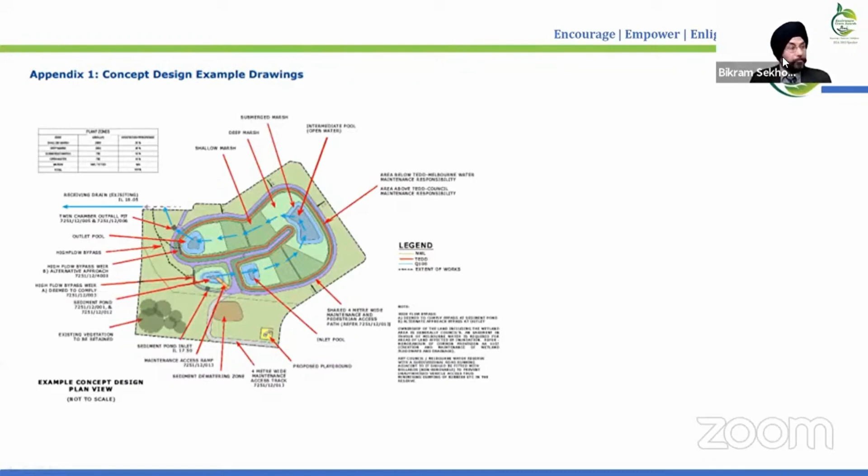I'm sorry, this is not... I hope you can... Yes, sir. We can see your slides. Can you see the screen? Yes, I can see your screen. We cannot see the presentation now. Can you see the... Yes, yes. Okay.

So the Australian experience is primarily based on how the residential development and how the water is used to making or enhancing the life. One thing I just make it clear that in Australia, especially in Melbourne, we are using rainwater as a major source of water for drinking and daily purpose. The groundwater either is not good or is not used for most of the time. So we rely on a water conscious development, which is the best use of every drop of the water available around us.

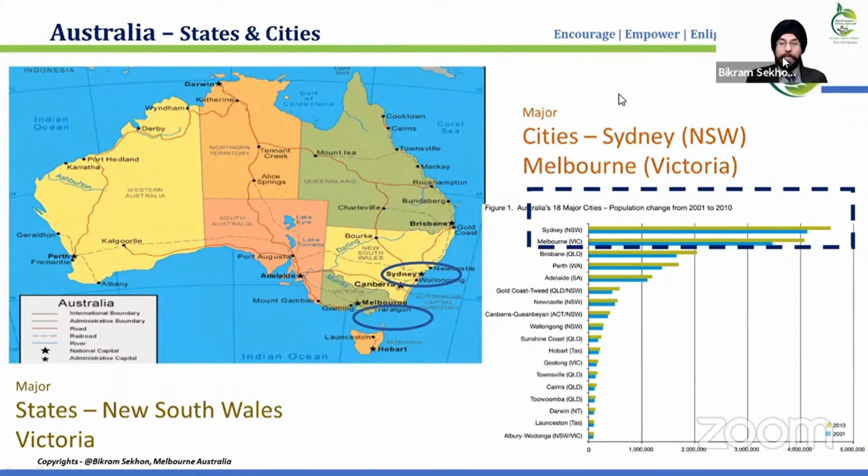But it's very important to understand now that over the years, what happened that Melbourne has become in the last few years most livable city, while Mumbai or many other Indian cities are unable to achieve such status. So this presentation will also give us an insight to understand our broad policy and design approach and what techniques we can develop in order to make our cities better.

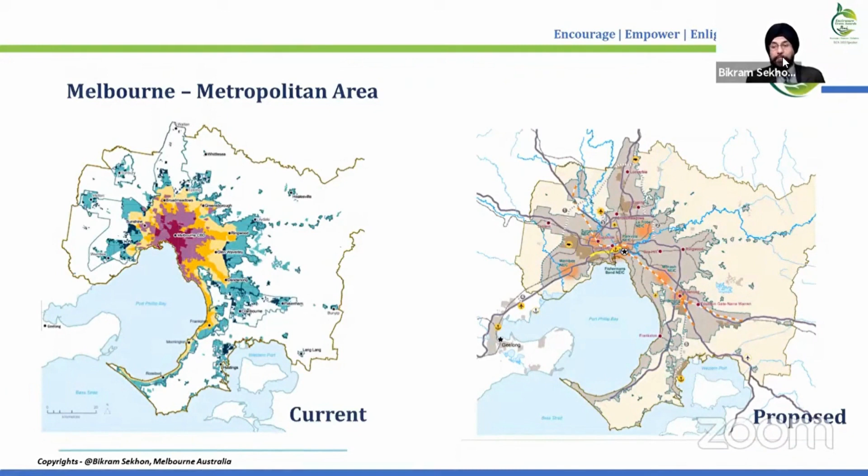This is just a broad concept how the Melbourne metropolitan area is. Primarily, the development is around network and how these networks we are developing as green networks. That is one of the area where the changes in policy and planning has been observed in last almost 2 decades. If you see broadly, try to make it conceptually clear. As we go into more micro details, we find there are more kind of activities at a local level. And when we go to the peripheral level or the city level, then the activities are quite broad in general. And in regional area, the context will be different. And similar approaches are adopted for Indian cities too.

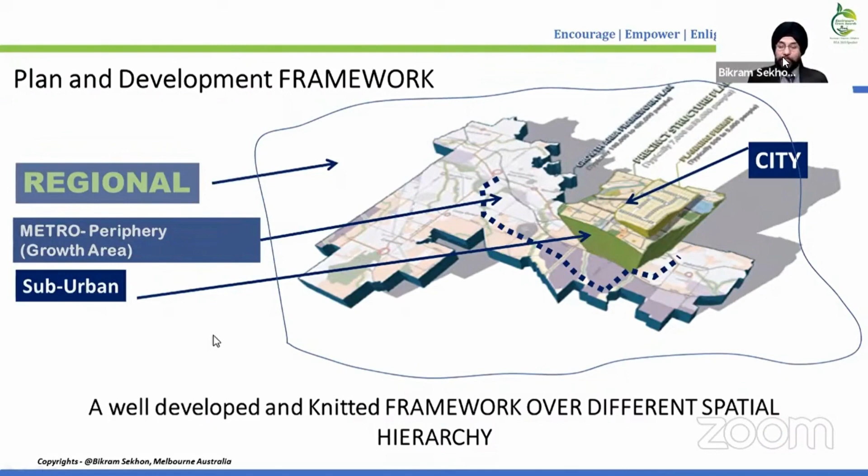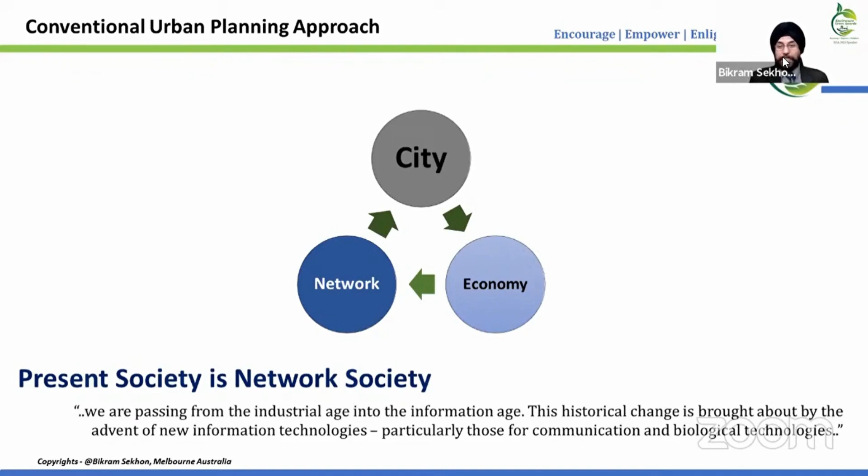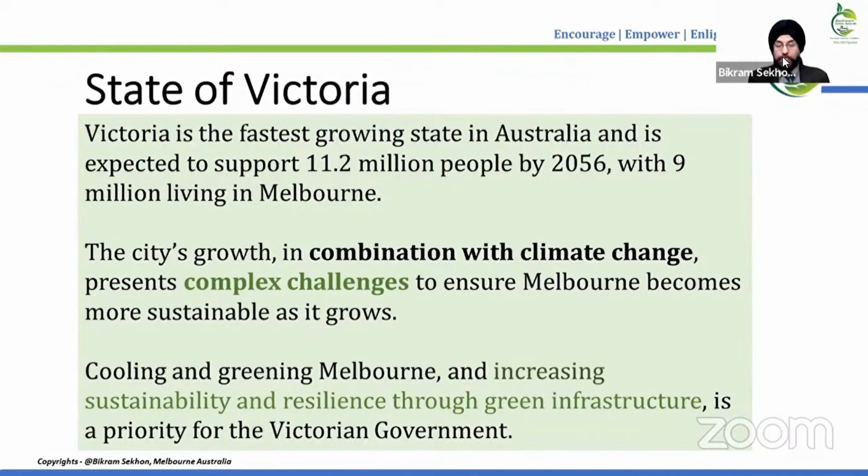So obviously, we believe the current society where we are living is primarily based on network and our cities connectivity and the economy related to them. But what is the new approach? This is the conventional approach that all over the world is used in city planning. But the state of Victoria has taken the complex challenge of climate change involved in urban development and considered these networks as a part of green infrastructure development. So this is one of the priorities to develop green networks.

So again, if I show you the same picture, here, now these two parameters are very important. The network for us are basically the green networks. So when we say green network, it means it has water sensitive techniques, it has the vegetation technique, it has the cooling environment, it has a better city look environment, and all these are embedded together in the form of urban design and urban planning.

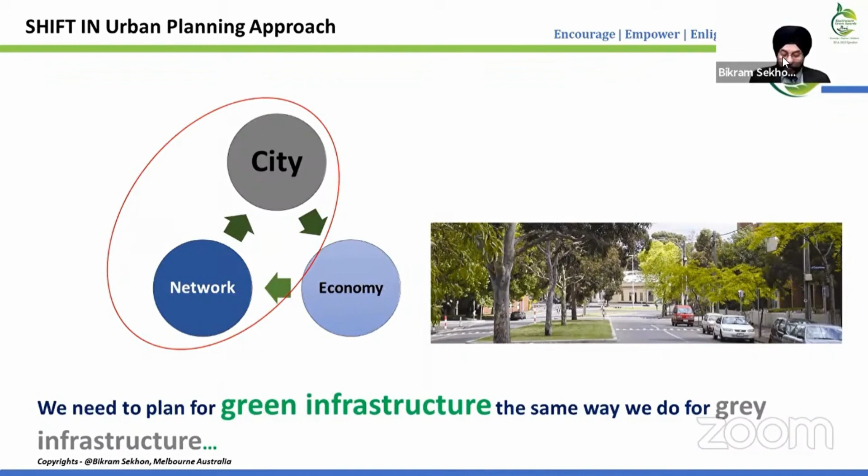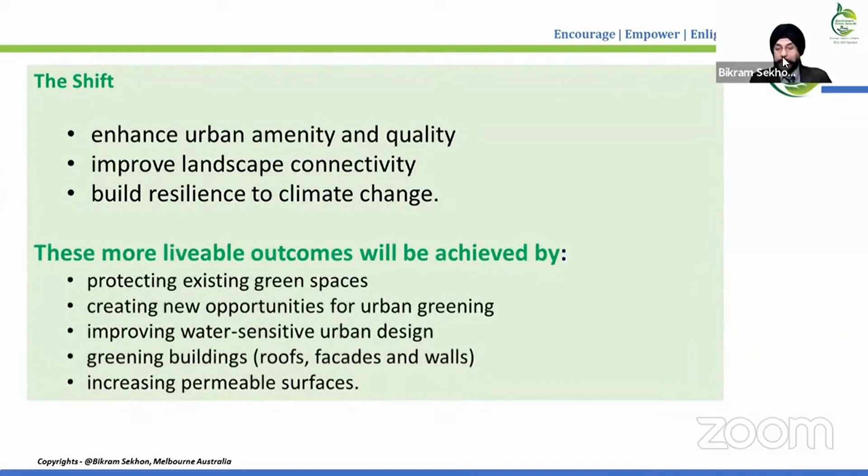So the shift primarily is based on enhancing the urban quality, enhancing the landscape connectivity, and also developing towards resilience and our tolerance to the climate change. This is the factor which is nowadays very important and concerns all of us. And to make the city more livable, we protect our green spaces on priority. We improve water sensitive urban design. We give greening of buildings, and we also make permeable surfaces all over and calculate and use them in the design data.

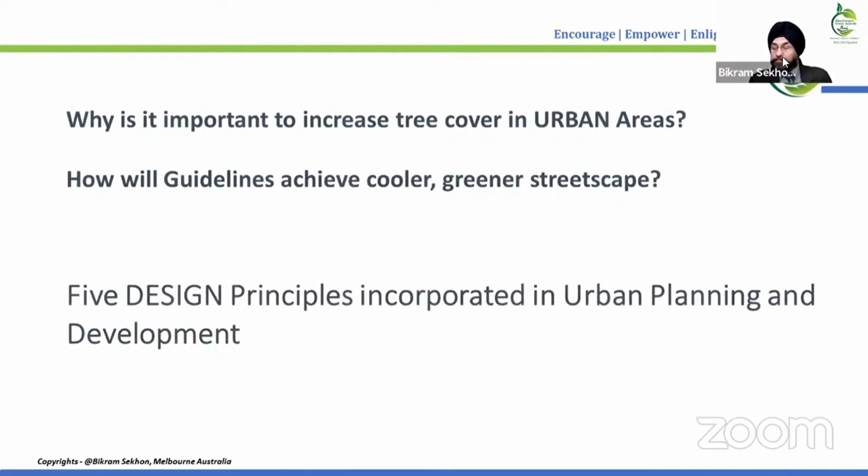We all know this concept of why trees are important, and the 5 basic principles which we use in our planning. The first 2 are on policy matters. That is, we should have places for trees. It's the wisdom of knowing how to plant a tree and where to plant a tree. And then we also need to create a surrounding environment around a tree.

And the last 3 points, if we see, are more related to design. If there is a tree, we also need to provide a source of water, how the trees are to be watered. And then we also need to provide supporting infrastructure to create activity and life around the trees. And obviously the last part is more about what we have achieved at the end of the day, which is more analysis, more objective.

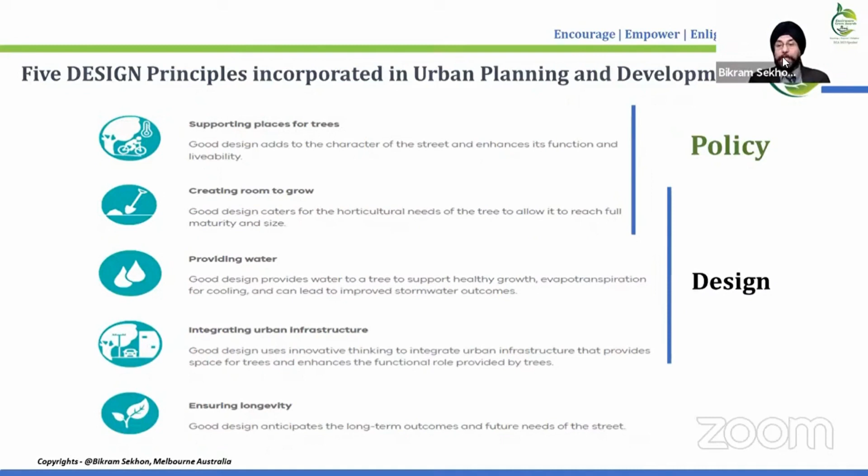So based on these 5 parameters, we design our cities, and I will go into further micro details of how these parameters are helping us achieve a better environment. Here I try to synthesize the whole system. The crux of the issue is that we have a very strong digital monitoring system for all the activities. And this is not a recent development; it has taken almost 3-4 decades to develop the whole network, where the universities, scientists, government departments, planners and decision makers developed a policy, and that created a national environment science program.

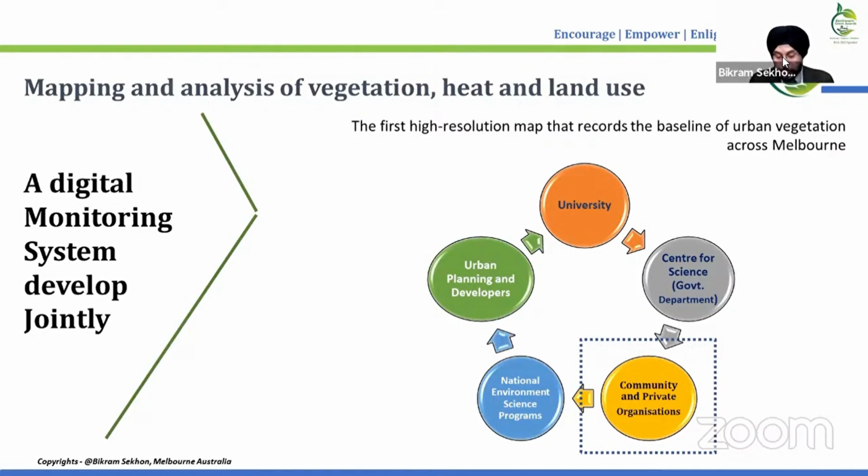And of course, this was possible through the collaborative achievements of community and private organizations. Since most of you are working in different organizations, if we make a collaborative and integrated program like this, we are able to achieve better targets that we can develop here. I will show you how these programs are helping each other.

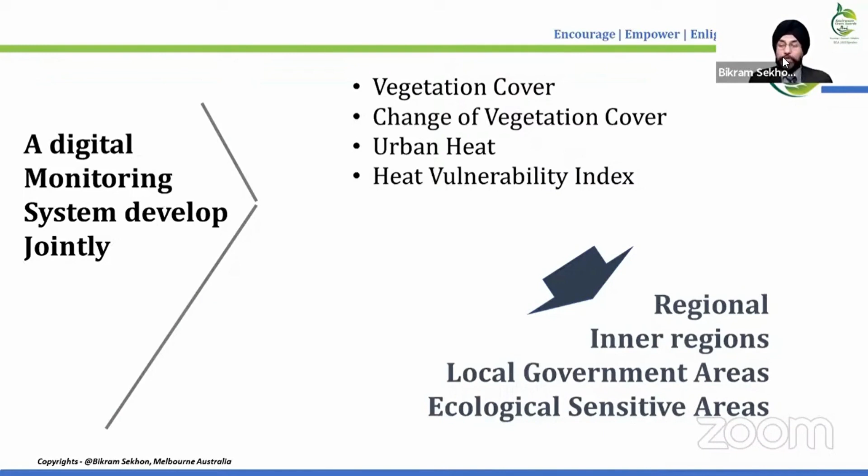So some of the common things that we are doing here, we have also done in Indian cities, like vegetation cover detection, heat vulnerability index, change of vegetation area, ecologically sensitive areas, but they're more on the policy level. We have achieved much less on the design and integrated approach level. Let me show you some of the action programs mentioned here. These are very broad, and I'm keeping it very brief so that you can detail out some of the areas. If anyone in the audience would like to detail out some of the action programs, I can do so later. I can also send them the broad programs.

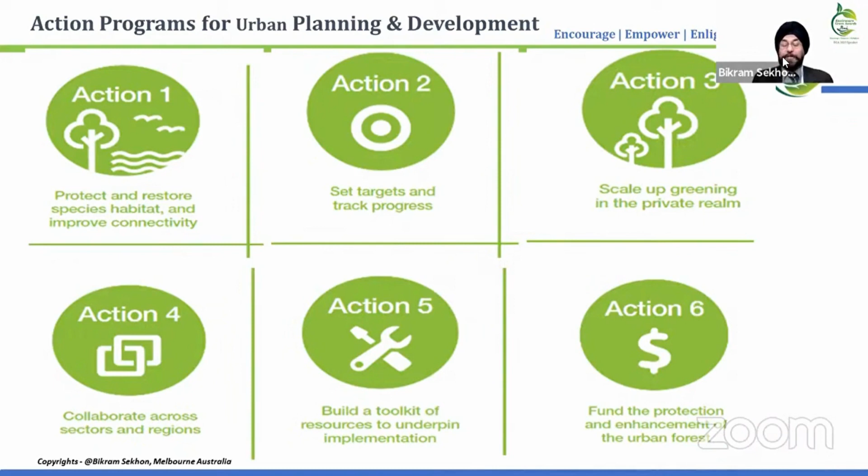Action 1, protect the resource, which is the species we have. Action 2, set targets. In every policy, in every design, make the objectives achieve the environmental objective. Action 3, scale up greening so that we can increase the greening areas. Action 4, we need collaborations. We need integration among other areas. Then building a toolkit, building a resource kit for each action group, even for the society. And at the end, which is very important, the 6th action, funding: how to fund the various programs in all these areas. If we integrate all the key aspects, 6 aspects, we can develop a better program.

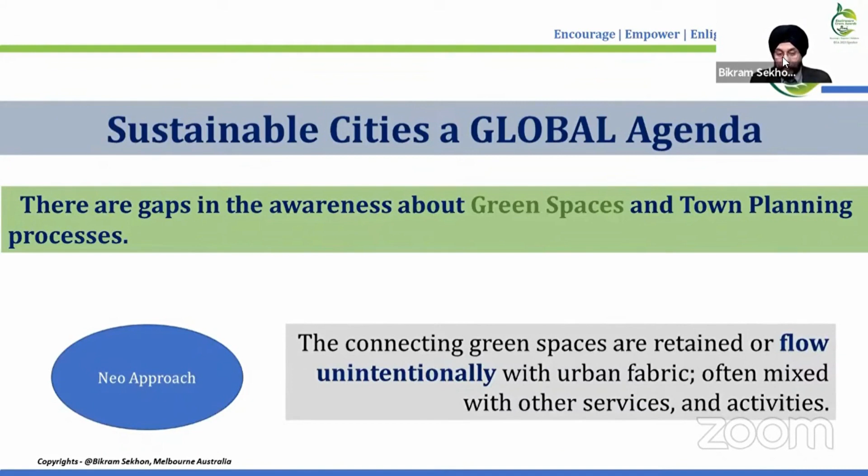Of course, we know that sustainable cities are a global agenda. But what is the new approach in urban planning and development? So this is the target we achieve here: we need to retain urban development within the urban landscape and manage the green areas, as I said initially, in the network. And here I'm showing you some examples.

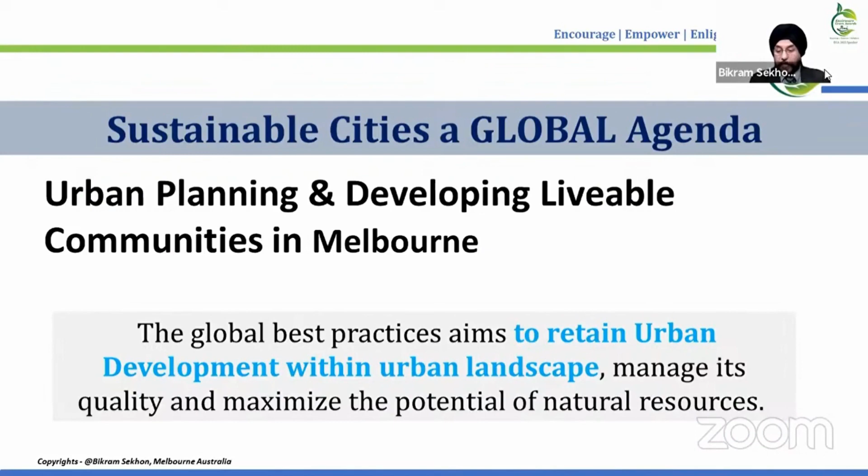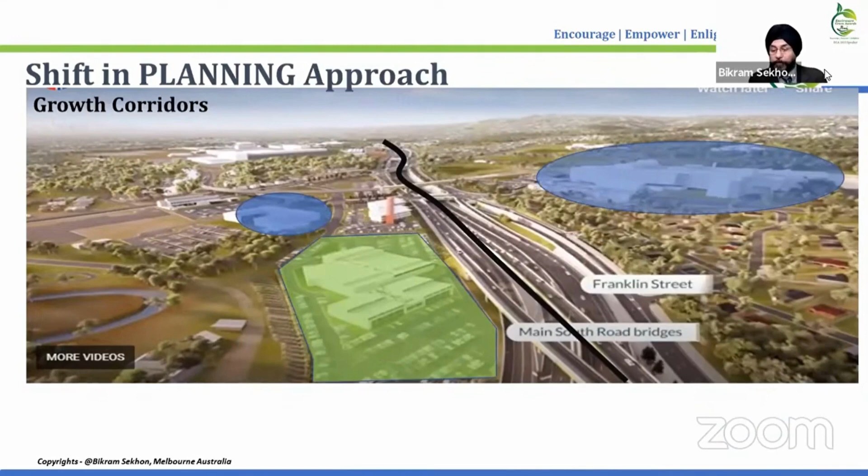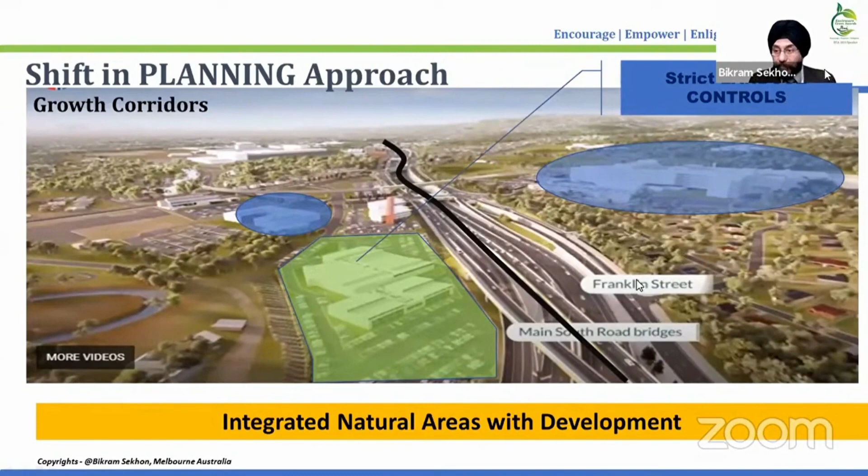This is a major highway that passes through the city. And if you see, in the city all these highways have strict land use control around them. One of the easy ways is to achieve integrated natural areas with the development. We are controlling the natural area, controlling the hierarchy of spaces. We are also developing cycle tracks and walking tracks all around the highways. We are also developing alternative transport modes, and less car-based networks, so that we can integrate with the other activities within these areas.

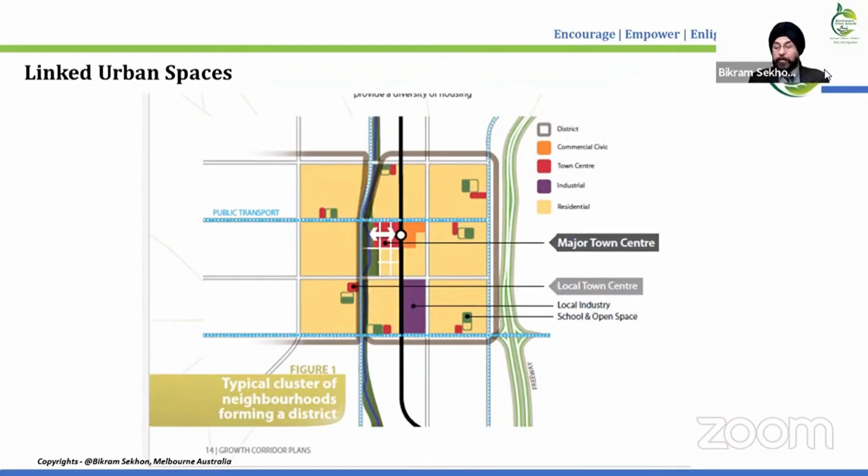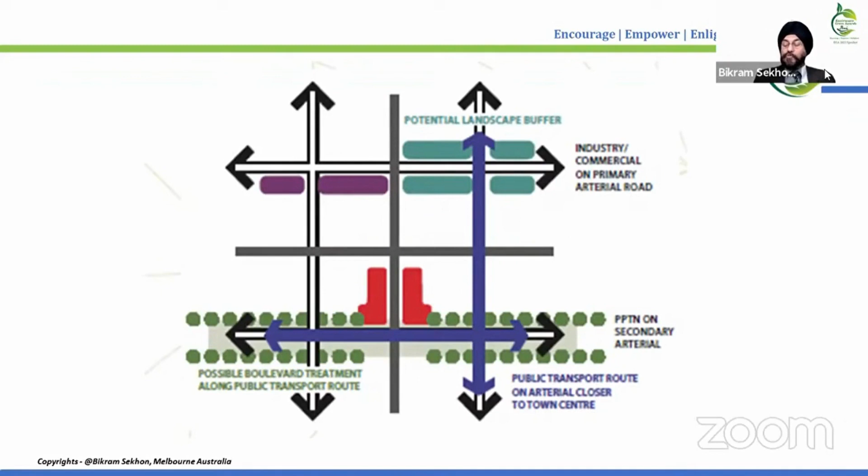This is just a snapshot of the various hierarchy levels of roads that most town planners use. If you see, this is the arterial road network based on bus public transport. And this transport is supported by a local level transport network. With this local level transport network, we integrate cyclists and pedestrians, and also encourage activity in those areas so that we can develop the green spaces.

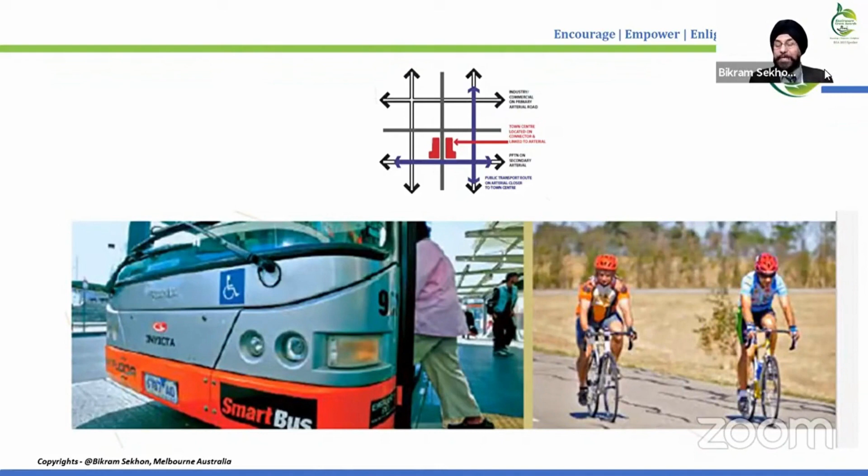And within green spaces, we try to create our movement pattern, and at the end of the day, these all enhance the sustainability of the area. Based on this concept, let's see how we can achieve it in a residential estate. This is the broad network plan of the north side of the city.

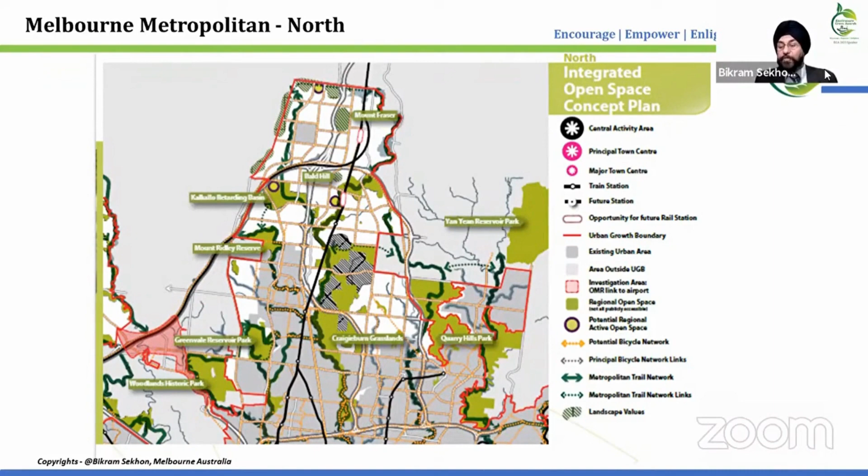I have shown you one map which was showing the network plan, but this is the recent network plan which involves a lot of green areas around the network, on a regional scale. If you go further into micro detail, I will tell you how, within these networks, WSUD, what we call water sensitive urban design guidelines, are helping various areas.

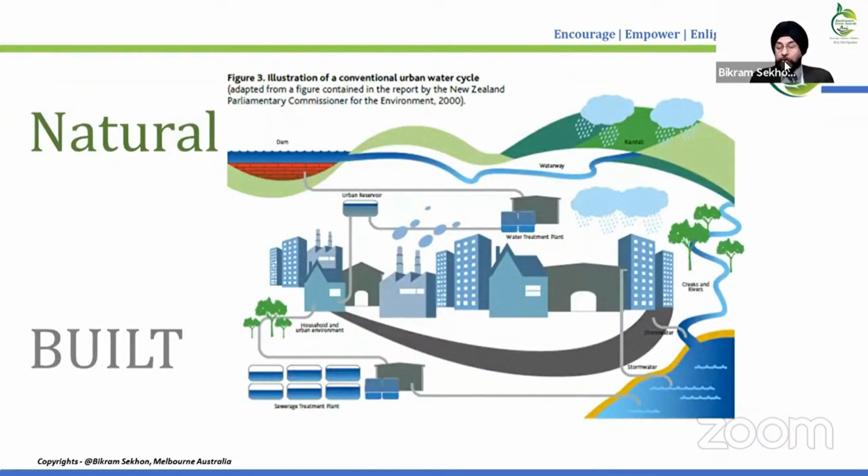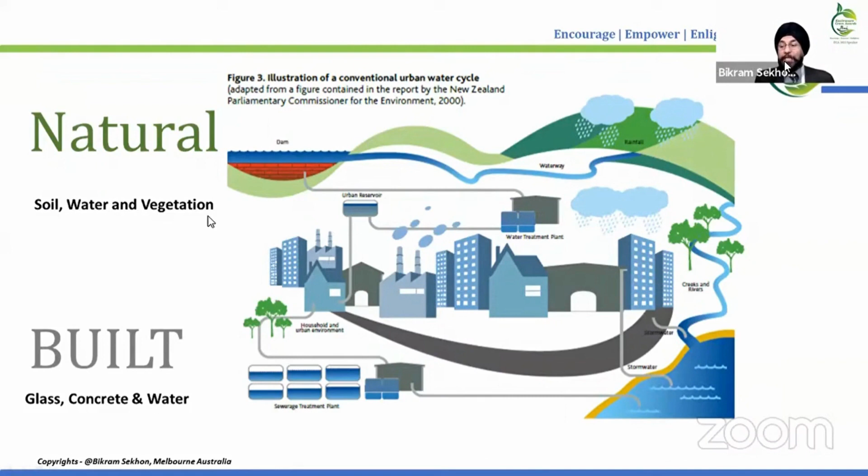Now, as a concept, in the natural area there is a combination of soil, water, and vegetation, and we are changing this pattern into a hard pattern of glass, concrete, and water. With this transition, we are changing a lot of chemical properties of the water, so the question is how to achieve the best WSUD objective in a natural treatment process so that we can achieve the natural soil, water, vegetation combination.

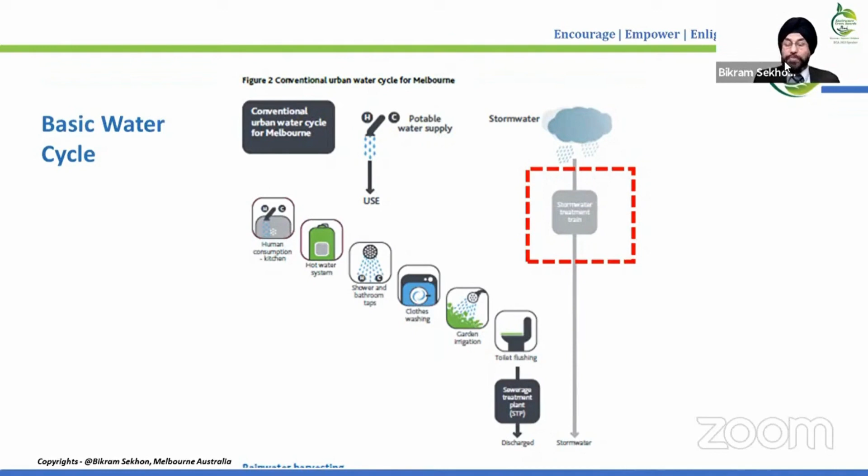This is the box highlighted here. If you cannot read the text, it is a stormwater treatment train. We treat the stormwater before it reaches the destination in such a way that it requires very little treatment later on. So when the water passes through the cyclic process, it's treated at every stage.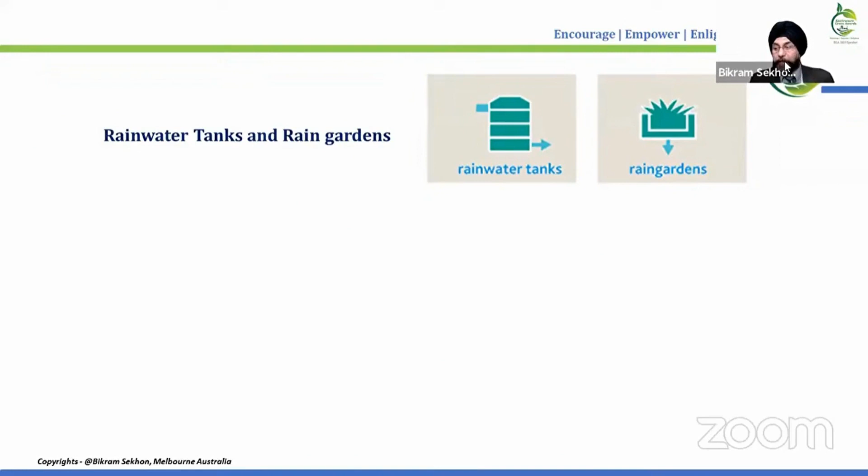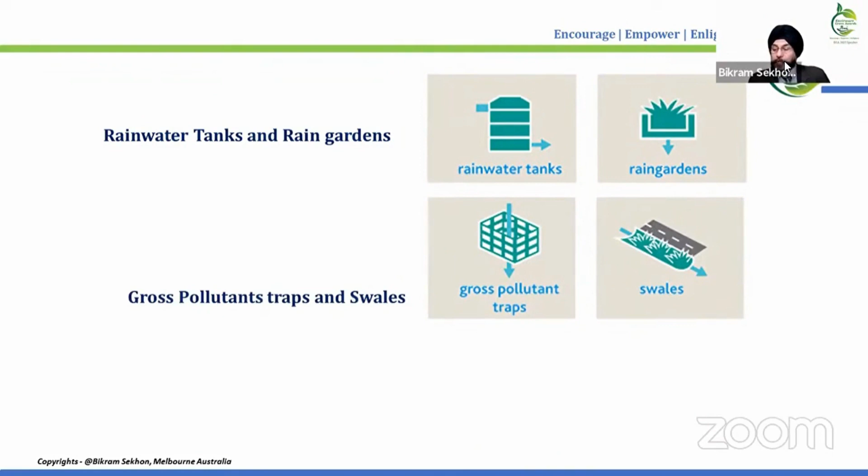The first part of the treatment train is like the rain falling on the roof of a house; it is stored in the tank, and from the home rain garden, it passes to the street. The street has grass, and the street has swales, which try to absorb more nitrogen, more phosphorus, and solid waste.

And then in the third step, it comes to the settling pond. In the settling pond, a lot of silt settles down, and then we create wetlands. Wetlands are created with set standards. I will show you some combinations of plants and some details of how the wetlands are an integrated part of urban development.

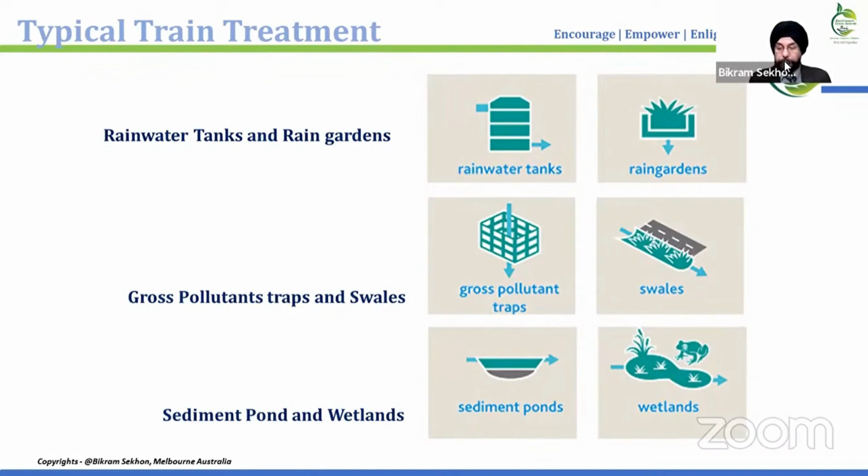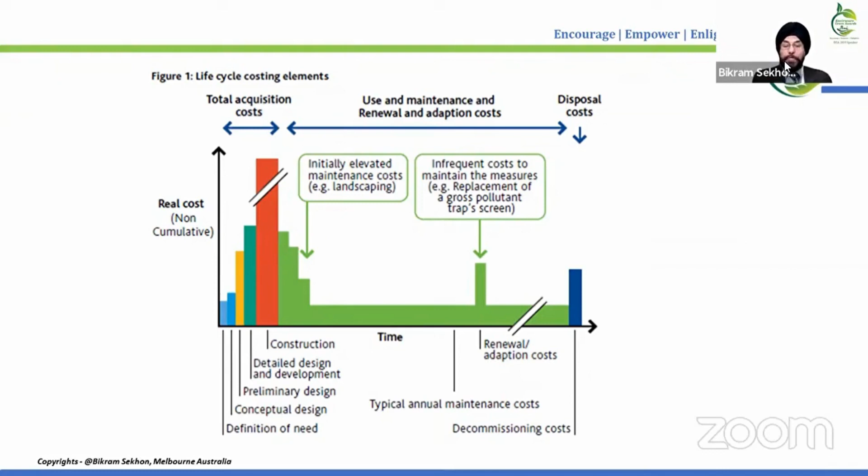This is just one slide that will help you to understand the life cycle, based on time and cost involved. What I mean to say is that the cost of green infrastructure is also integrated as part of the project. The project is not designed in isolation; rather green infrastructure is included, including the maintenance, and including the last cost, if we are to remove some of the infrastructure or decommission some activities, that is also part of the cost.

This stormwater perception seems a complex situation, but it's very simple. I tried to develop what is the core, what is the heart. The heart is the combination of trees, water, land or soil particles, and a perfect combination within these. And when we develop the gray area, which is primarily the used area, it has to be designed in such a way that we are able to achieve the natural environment in that area.

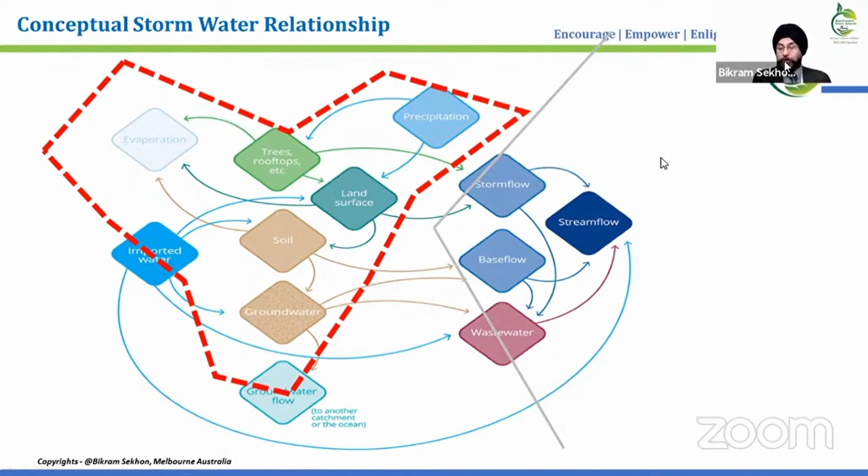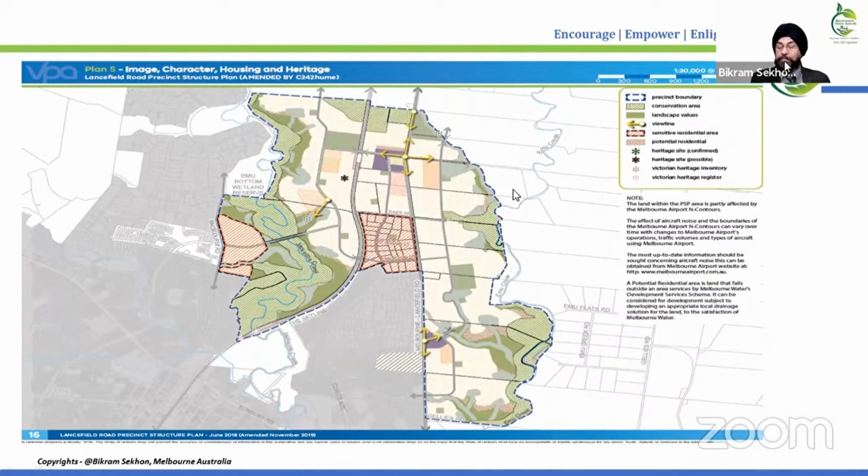Let's see further. I have selected a residential estate in the northern area, which is a neighborhood area. The small arrows in the roads are the viewlines, the linking activity points that are affecting the environment. And all around this residential development, there are natural creeks, nalas, around which we develop in an integrated manner.

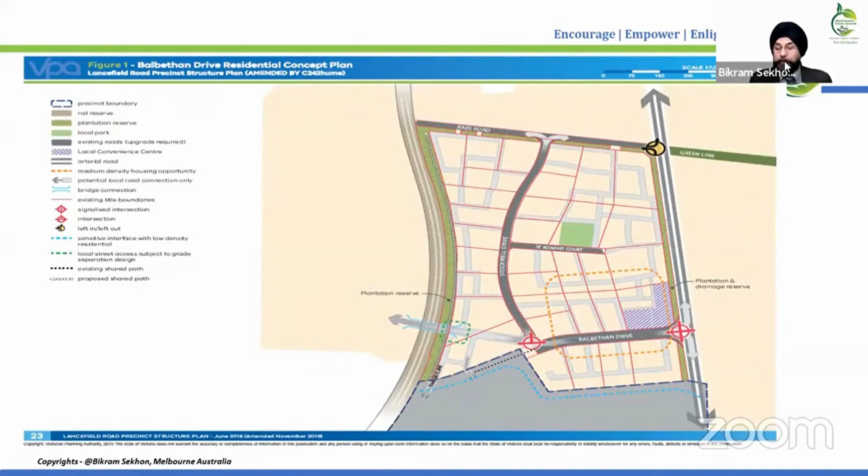If you further zoom into small areas, you'll find more detailed, more integrated green areas along the urban creek bodies. And in the road areas, there are further elements which affect our green infrastructure. So the road is not designed only as a movement for vehicles. Rather, the road is also a water carrier channel. To see how this water carrier channel works with the green infrastructure, let's go to a cross-section and detailed design of a residential area.

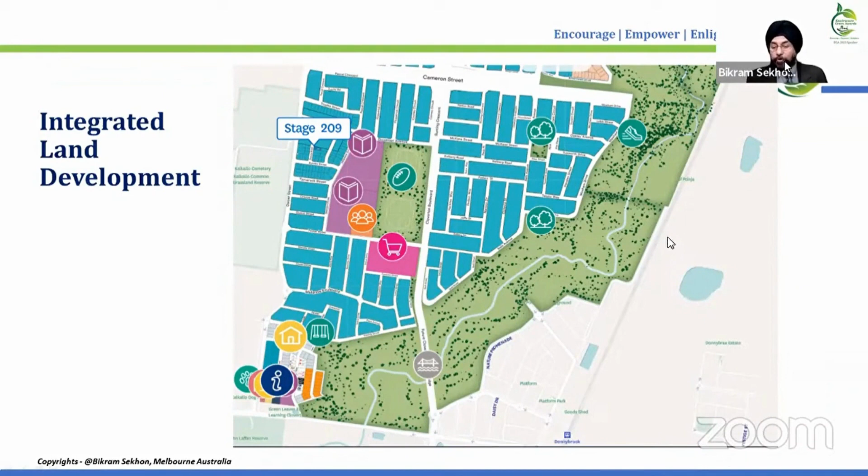This is a large residential area where you can see the area around the creek is developed and earmarked for all the natural flow that has to be considered. The chemical and biological properties of the creek are studied in detail. In the detailed analysis, the water from the paved areas enters small catchments. Each residential area is divided into small catchments, and roads and streets are designed in such a way that water can reach the creek in an efficient manner.

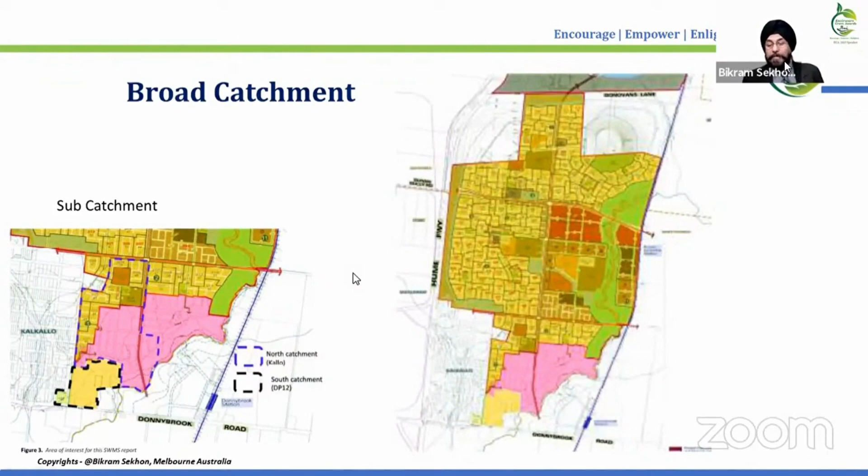The first part is to monitor the existing health of the water body. If any development is occurring around an area, the first step is to monitor the water body. We study the chemical properties, the biodiversity, the water life in that area, and the policies are designed so that the pre-development life has to be achieved with the development.

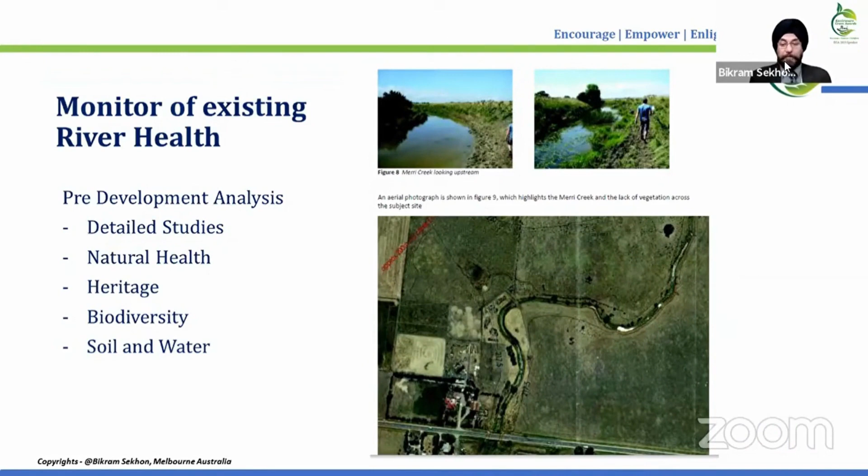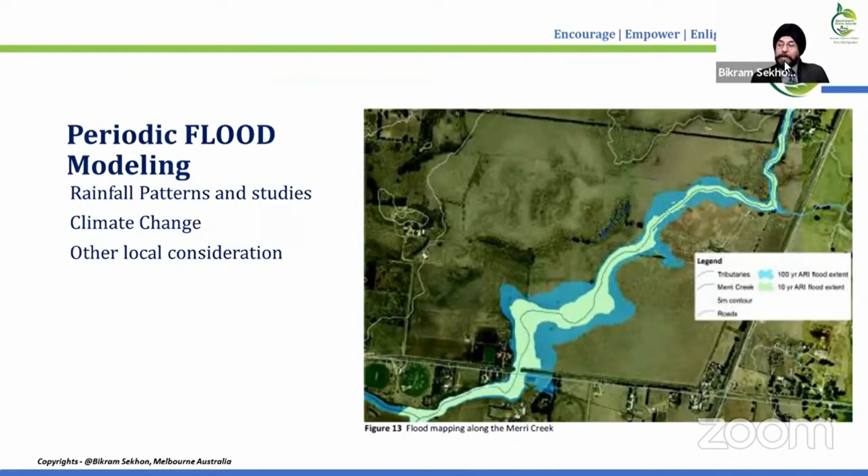If we are unable to achieve the pre-development health, then it means something is wrong in the development scenario. So a lot of scientific studies and technical studies are done before any development activity occurs in that area. The rainfall patterns are very rigorously monitored. The climate change data with the behavioral changing patterns are also included. Any local consideration of the soil, vegetation, geology, geography, and any vegetation which is important for microclimate or native in nature, they are part of the decision making before making a development.

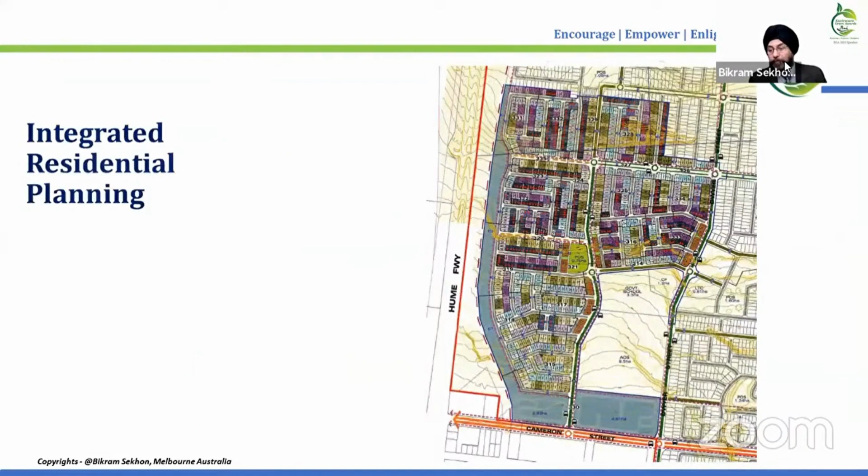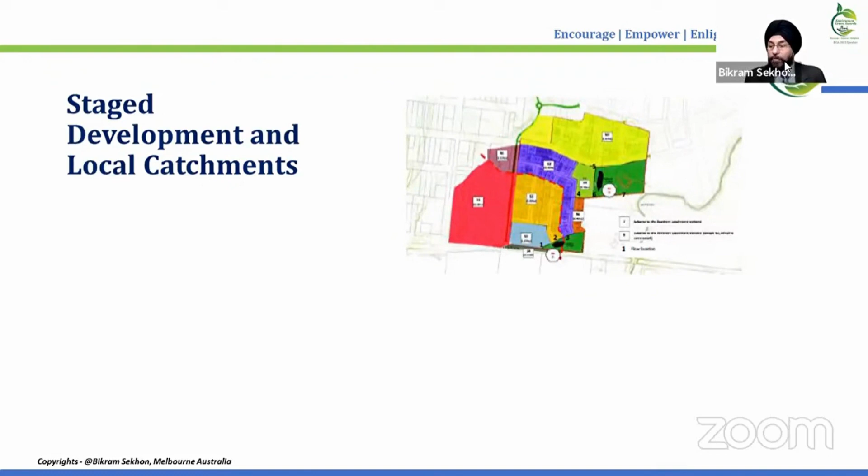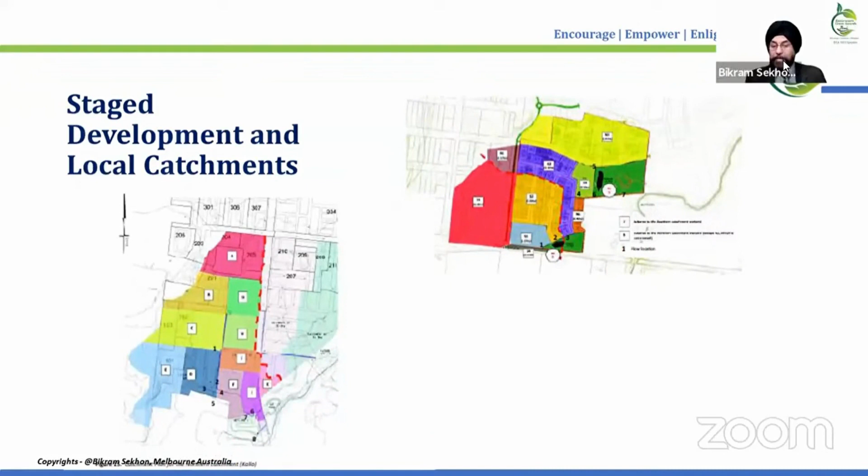This is just one screenshot showing how the development is integrated, and all the color shades are integrated in the sizes. I will further zoom into one of the street areas. These color patterns indicate the water flow catchment area of each street, how the water from houses enters the street, and then we design our infrastructure according to these small catchment areas. Each catchment area is numbered according to the house value. If you see, this is one of the details of the catchment area, where the flow pattern from each street, each house is monitored.

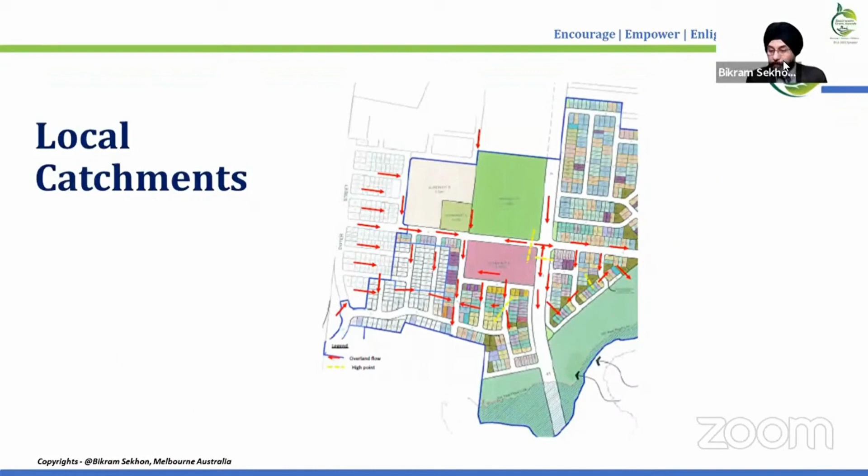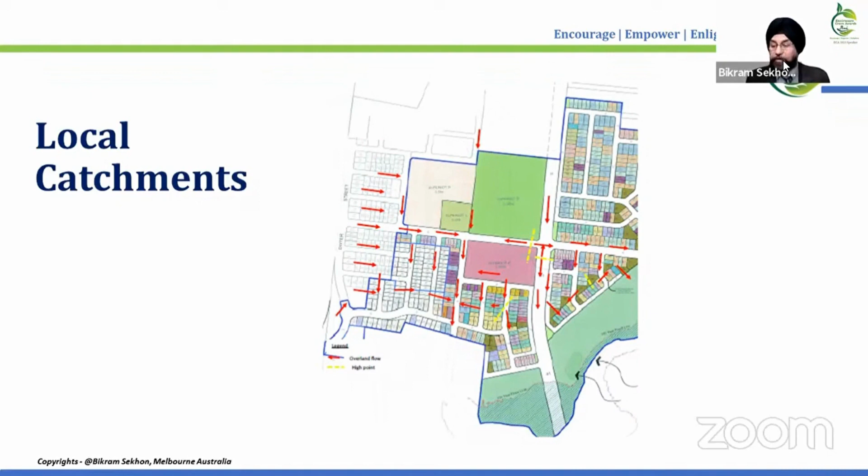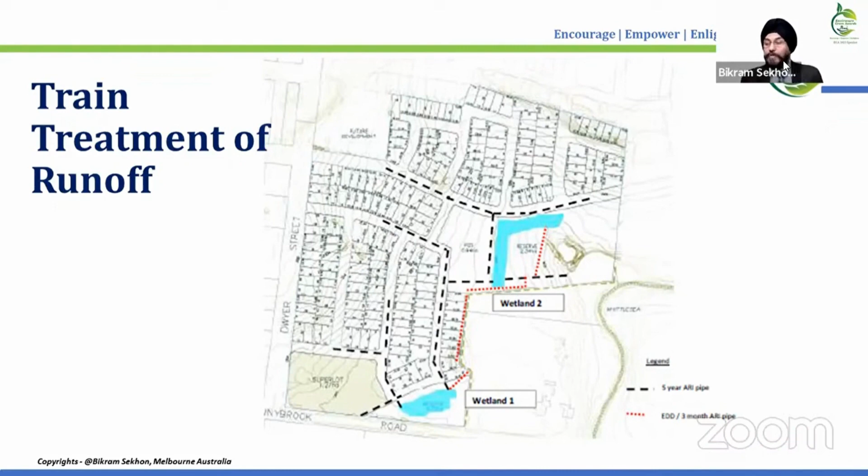The street levels are designed in such a way that water can accumulate through the road and ultimately reach the desired point of the wetland. These are the prime networks, and there are wetland 1 and wetland 2. If I go to the previous slide, these are the streets, and wetlands 1 and 2 are fed by the catchment areas generated from those residential areas. In a development of about 10,000 houses, there are likely to be 7 or 8 wetlands. So the water from all these houses goes through various levels of treatment, reaching the wetland and then the river to feed in a natural way.

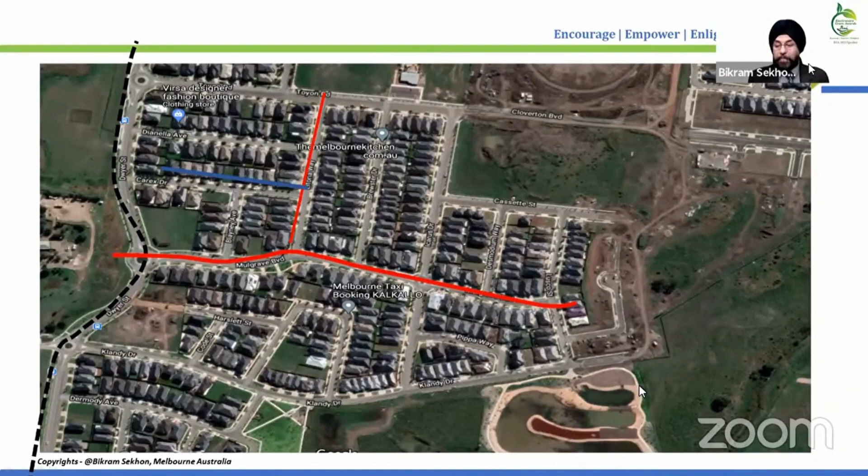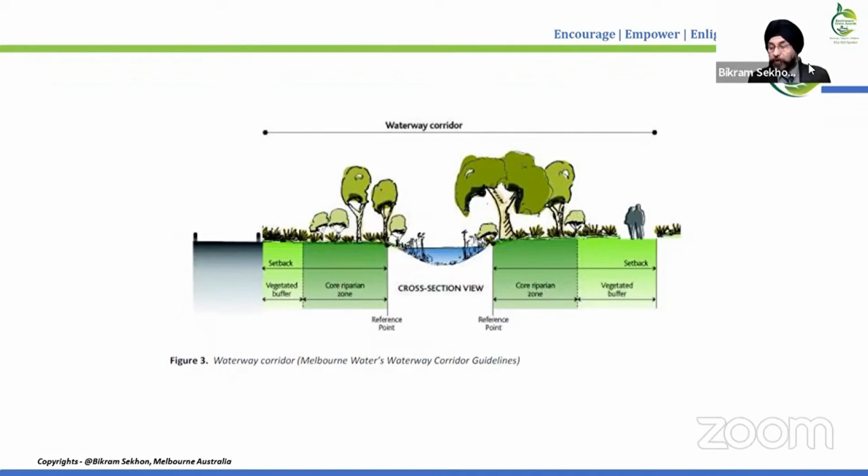So this is one example. With all the planning, at the bottom the wetland has been developed, the roads and streets have been designed, and ultimately the water is reaching. How this water is purified, I'm giving you some more localized, micro-scale examples. First, this is the cross section of a road. From a green infrastructure point of view, the road is designed as a water carrier. The road has setbacks, a natural strip, a footpath, a cycle track, and a pavement, which is the concrete area. But that pavement is designed to cater the water along with the vehicles.

This is one example of a street and one vacant house. This is ultimately what is achieved, and it is available in Google Street View. I will send you the link, so you can see how this is actually happening. The kerb on the side, there is a pit in front of the home. That pit is a water absorbing pit, and the green area in front of the house is the natural area that is supposed to absorb a lot of the runoff from this area.

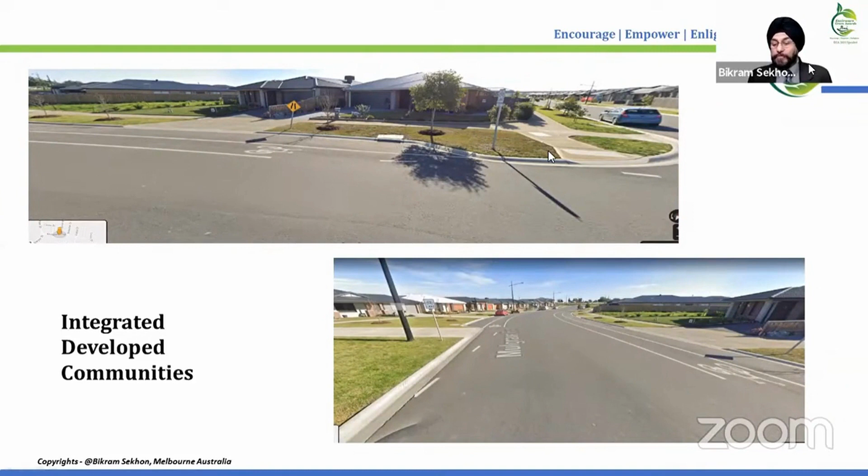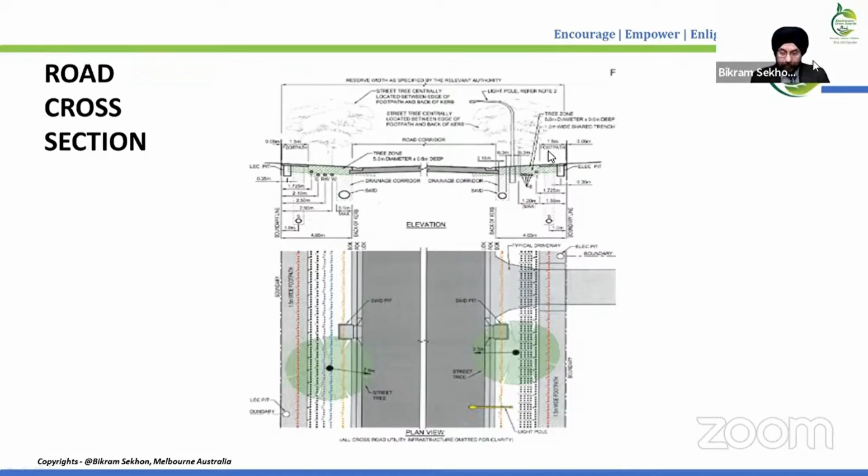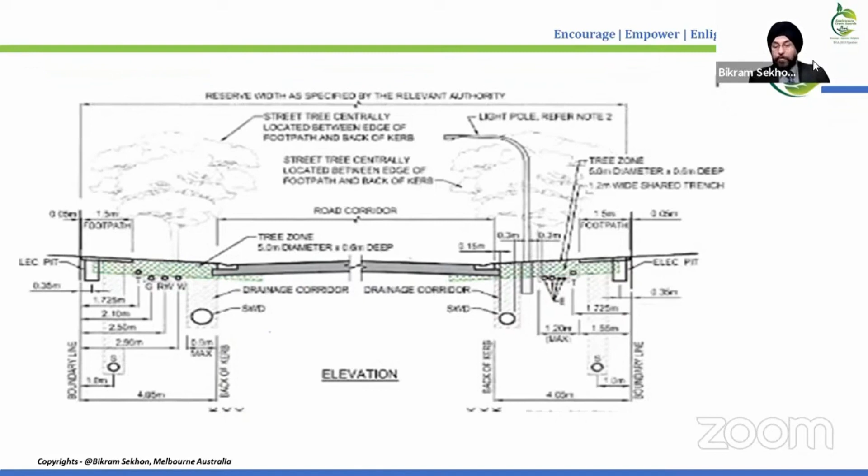This is the cross section of a road. The road has the green area on the side, with all the infrastructure below it. The levels of the road, the camber, the slope, the directions, all are designed based on a particular rainfall pattern, and flood modeling is done for how much water can be carried below the designed infrastructure. Zooming further, there are stormwater, water supply, and non-drinkable water pipes. There are 5 or 6 types of infrastructure that run along it, and most of it also has green infrastructure to absorb the runoff in the surrounding areas.

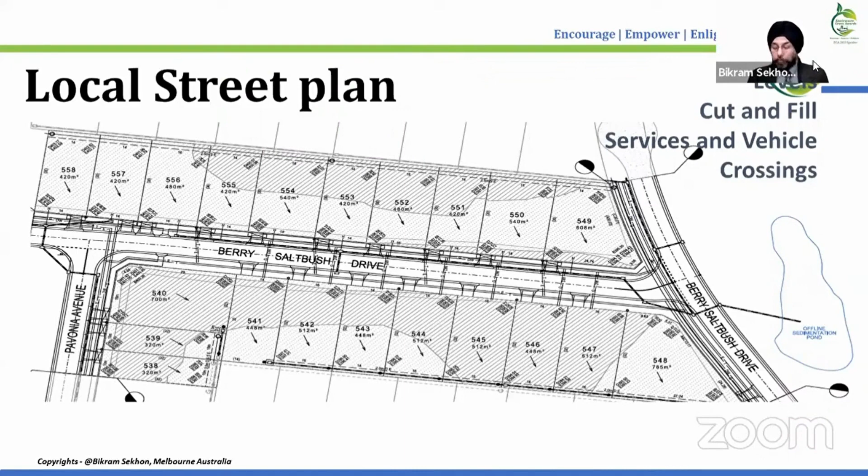This is a local street plan. I will focus on some key elements. You can see these numbers. There is a cut and fill plan, a level control plan, and a pipe and detail plan. All the houses have a number, an area, and a level control system. The whole residential area is designed in a strict level control system, because we have to carry the stormwater from a property to the street, from one end of the street to the other, and up to the creek. All these numbers are the existing level, proposed level, or building level, fixed at the initial stage so that water cannot pond or stagnate.

You can see all these cut and fill areas, all these, if there is pedestrian or other infrastructure, they are initially decided in a well integrated manner.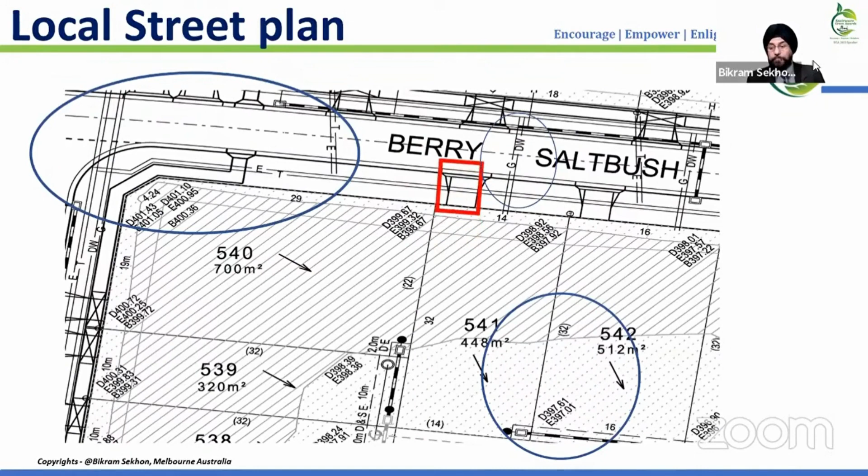This is the plan of a house. Even the right side plan, you can see there is a backyard, open area, and how the open area is sloping towards the paved area. And from this paved area, the water is entering on the street, and the street is also leveled. And these levels are strictly followed, and for the rest of the life, like next 200 years, 500 years,

these levels will not change. The level of the road and street is a legal document, a legal number that is fixed, and it cannot change. And it is verified periodically after so many years if the level is changed, because it will disturb the whole surrounding area.

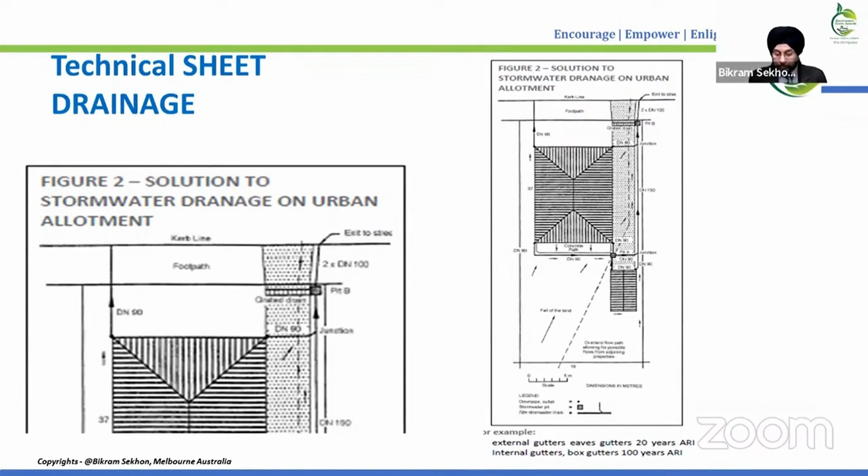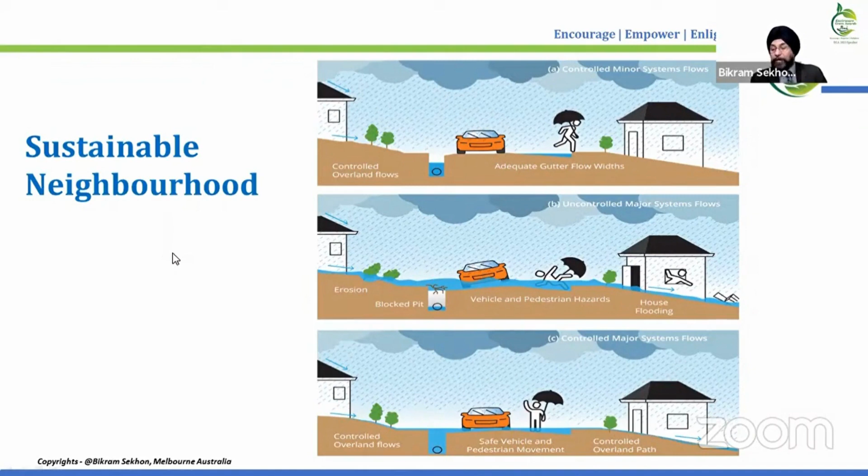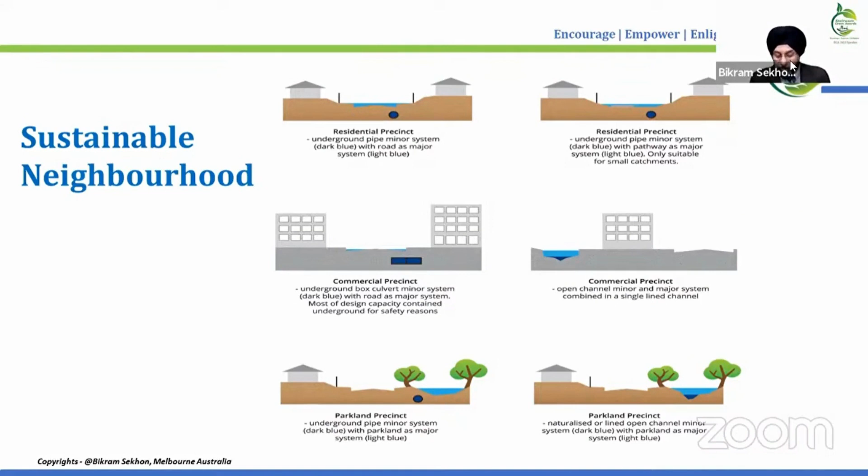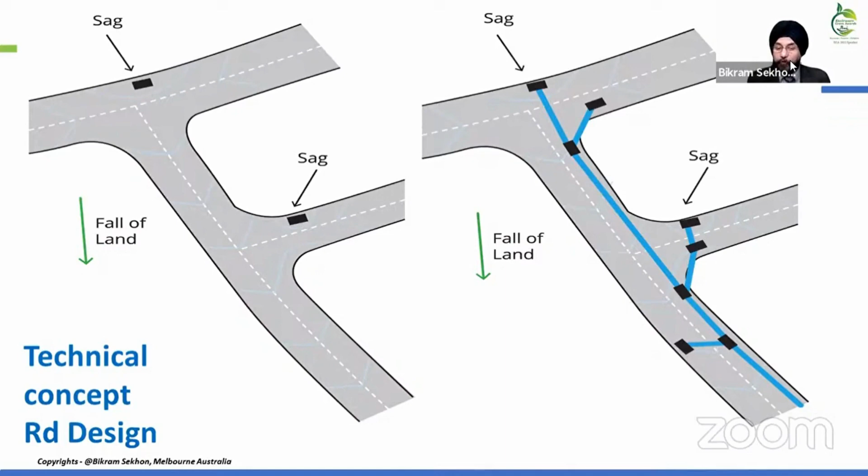Let's see the cross section of a road. This is a road. In a road, on the left side, you find two black dots, meaning they are the catching pits. And on the right side, all the connecting infrastructure in the sag and crown has to be created in such a way that water can flow interconnected with each other. So the fall of land, the road is also sloped according to the detailed plan.

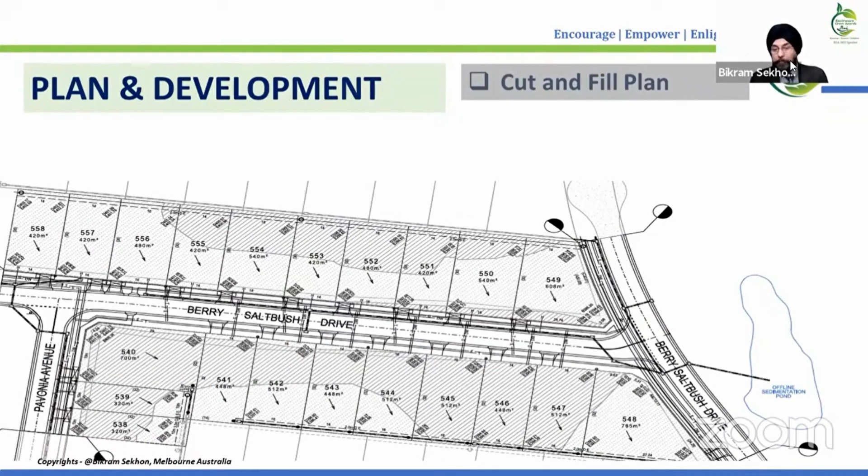And if you see the further development, now I can make some concluding remarks out of this. So we have to make a cut and fill plan. Then we have to project estimates and budgets. Then involve strategic planning and how much widths we require. And then we design intersections, and then we standardize it. And based on these two, we design road components and pavement, but also including the natural element within those areas.

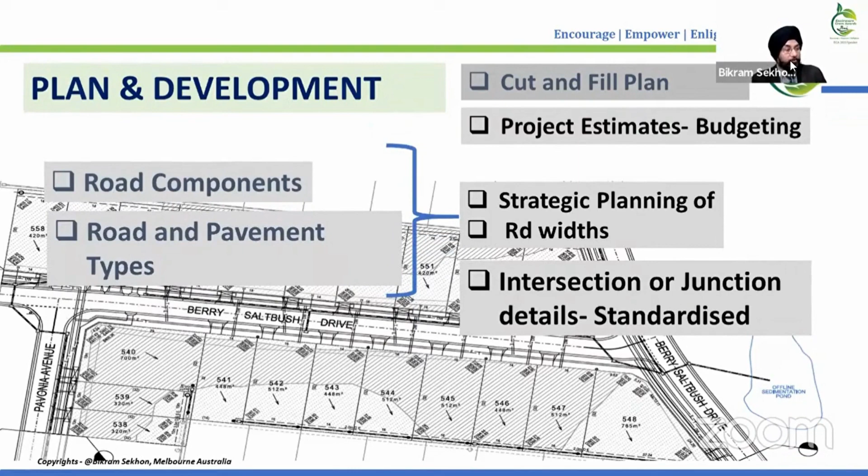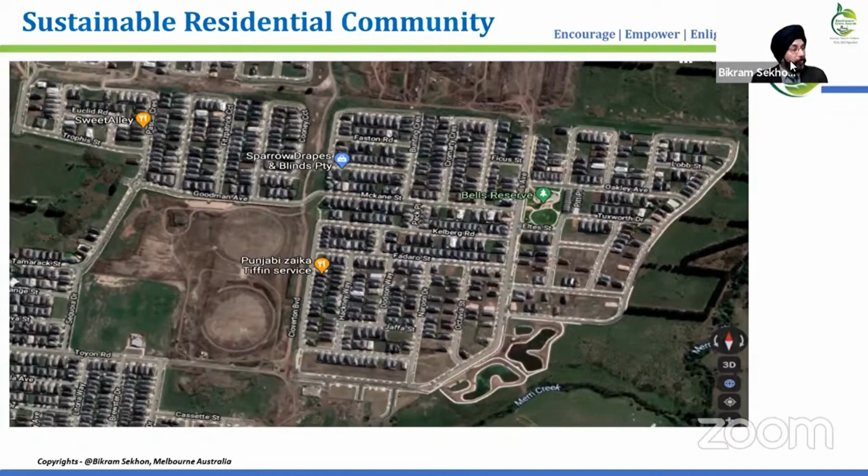When we achieve this, the same residential area, you can see the two wetlands at the base and all the design parameters right from a house, from an intersection, from a corner, are achieved to the end. And from those two wetlands, the water goes into the creek. I will show you a wetland detail concept plan too. So this is the concluding slide here.

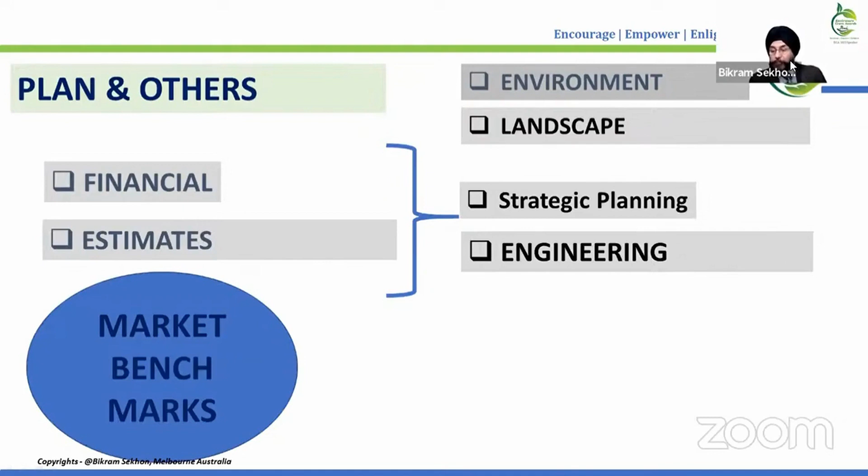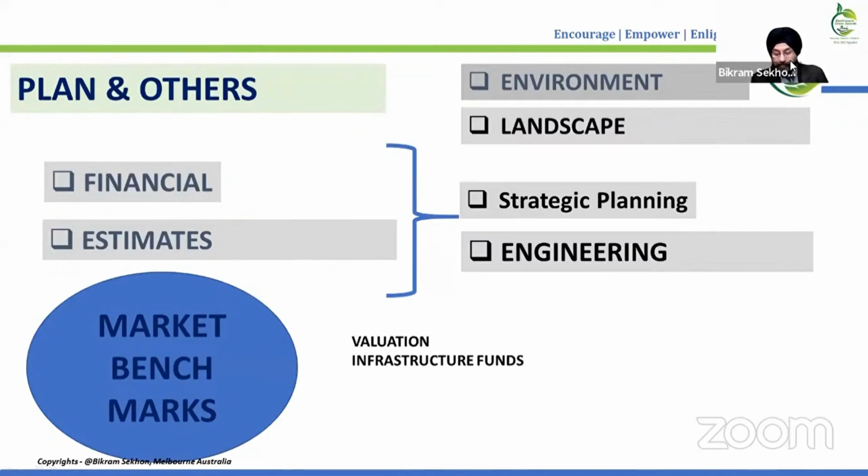Which is primarily for marketing in those areas. And if we see, within this marketing environment, landscape, strategic planning, engineering, all have to be added, and then we create a valuation for the infrastructure fund. Of course, these are all integrated with the finance and business targets. And at the end of the day, in India, most urban development is primarily through change of land use and EDC rules, and they are coordinated in the planning and development scenario.

One of the slide pictures, if you see, from the pit, which was in the beginning, I'll show you here. Related to the wetlands.